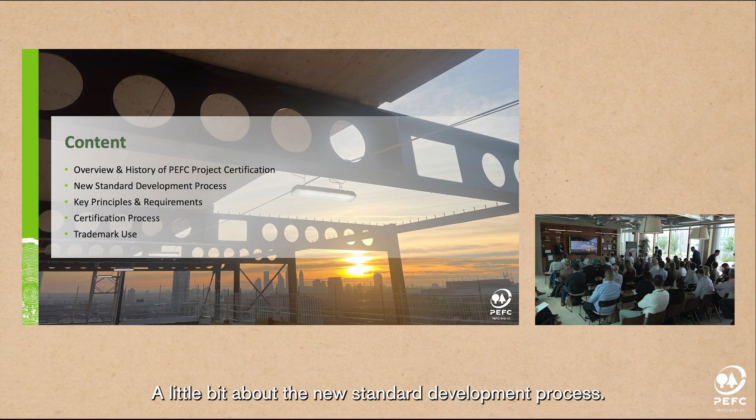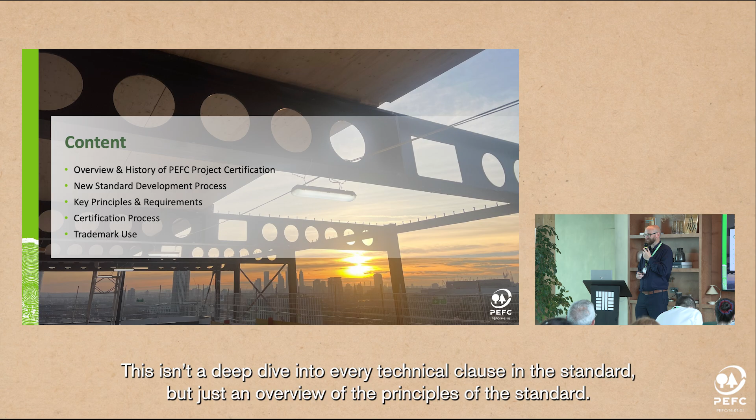Just an overview of what I'll talk about. We'll look at an overview and history of PEFC project certification, a little bit about the new standard development process, so we know who is involved in the development, and an overview of the key principles and requirements. This isn't a deep dive into every technical clause of the standard, but just an overview of the principles. I'm happy to discuss the technicalities with anybody who wants to know more.

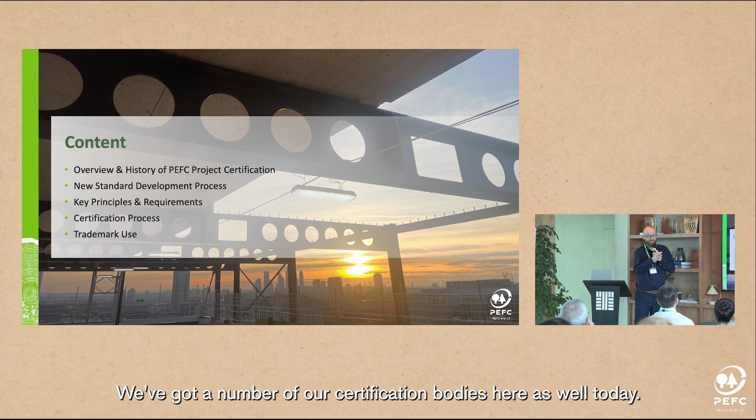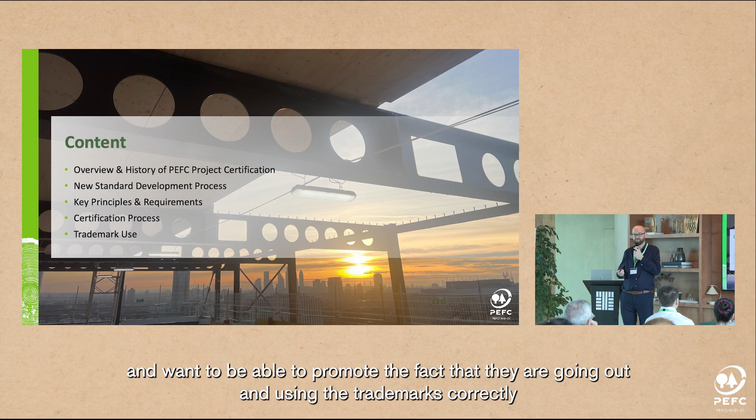The certification process, just an outline of that. We've got a number of our certification bodies here as well today, so it'll be good for them to understand that as well. And then also trademark use around projects, an important thing that organisations who want to go with certification want to be able to promote the fact they're doing that and use the trademarks correctly, to enable them to make statements and claims about their projects.

Okay, so just a little bit of an overview about project certification and what it is. It's a management system based on the chain of custody requirements that can be applied to projects rather than specific products. So actually for a project like this, it's what happens within the scope of the project in terms of timber procurement in relation to the project itself.

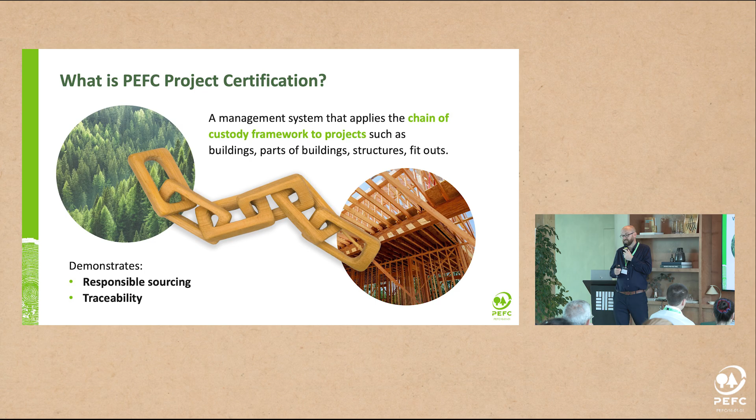It allows certificate holders, developers, contractors to demonstrate responsible sourcing for a project, and also traceability of those timber products back to either a certified origin or a controlled origin, depending on the timber.

In terms of the history, the first certified project was the Lighthouse building at the Zaragoza 2008 Expo. This was based purely on the chain of custody requirements, since at this time PEFC didn't have any specific project certification requirements.

2012 was a bit of a milestone in the UK and globally, as it was the first project that achieved both FSC and PEFC dual project certification.

In 2014, that was the point at which PEFC actually came up with the first set of requirements. They were tucked away in a guidance document associated with the 2013 version of the chain of custody standard. At the point we revised the chain of custody standards in 2020, that guidance document became more and more distant and was getting out of date by the day.

Interestingly, case in point here was when Timber Square engaged Preferred by Nature to do the audits here. Charles Townsend phoned me up and said, 'John, do PEFC have any project certification requirements?' I had to steer him in the right direction to those. So yeah, this was on the agenda for PEFC International to revise these requirements, and this is what we've been working on over the last 18 months.

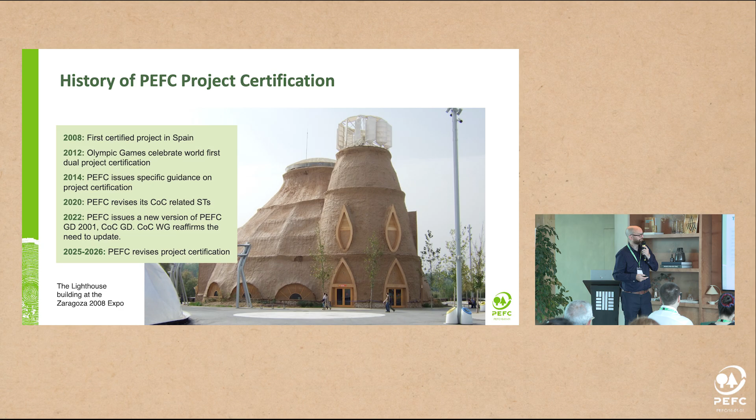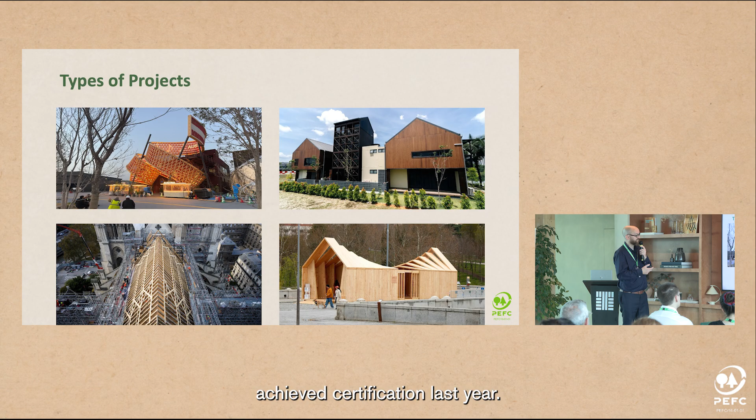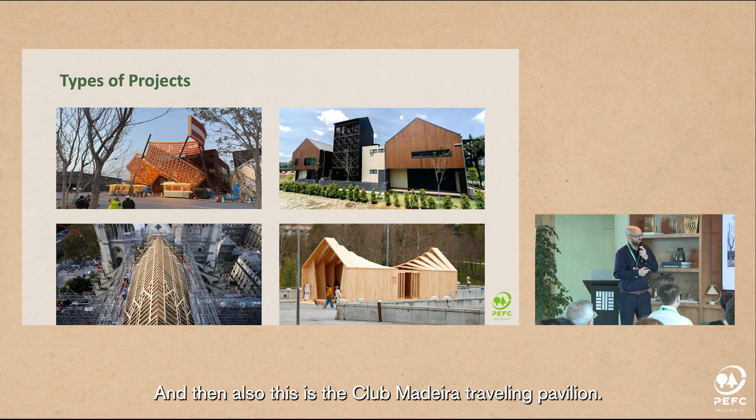Notre Dame de Paris, the rebuild following the fire, 95% of the timber in there was PEFC certified. And then also, this is the Club Madeira Travelling Pavilion, Waugh Thistleton designed, which just achieved project certification, a lovely little structure. In terms of the UK,

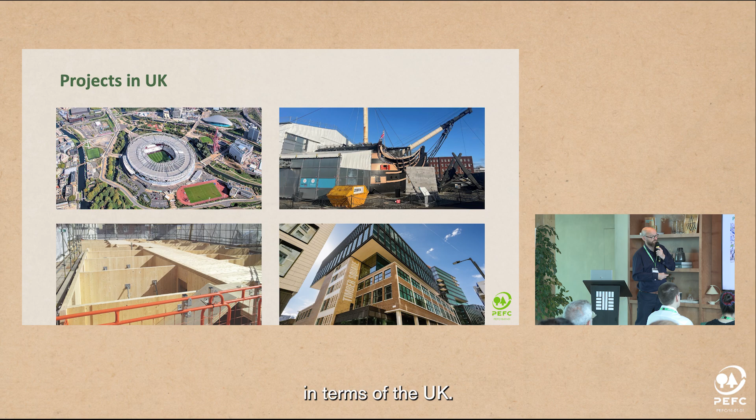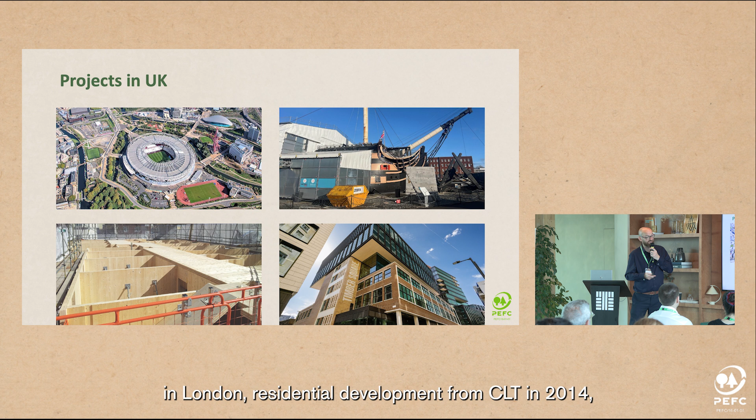we've had a limited number of PEFC projects, but actually we've had an increase in the last couple of years. As I mentioned previously, Olympic Park, Kingsgate House in London, a residential development from CLT in 2014.

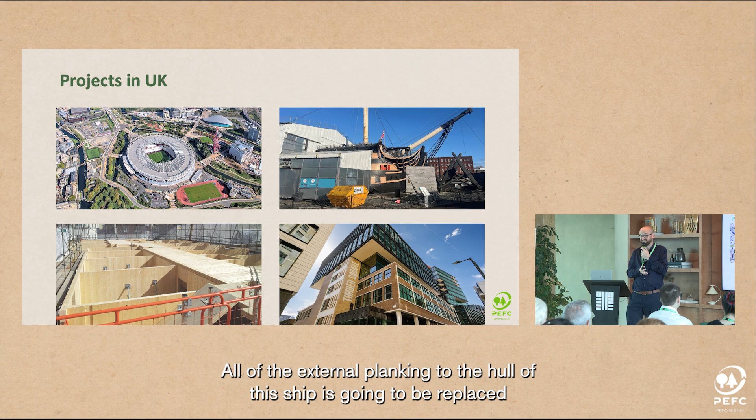Current ongoing project, HMS Victory, a 10-year conservation project. All of the external planking to the hull of the ship is going to be replaced. It's about 330 cubic metres of timber that's going to go in there, and it's all going to be oak. The idea is PEFC certified. They are just getting themselves ready for their first audit,

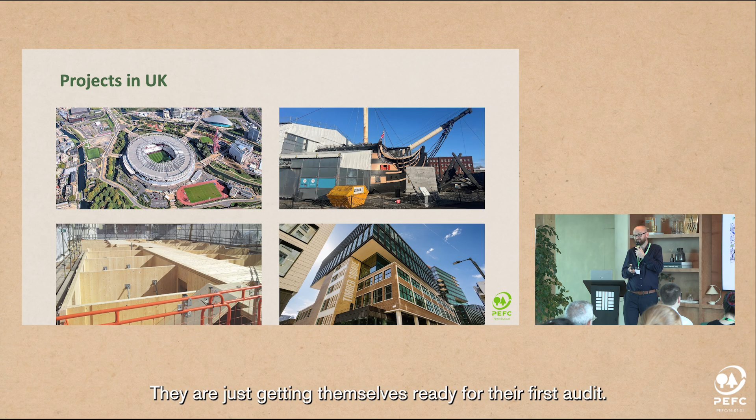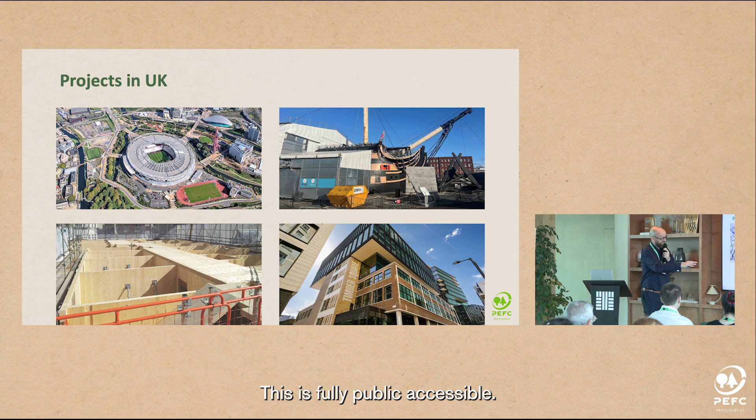so they will be either the first or one of the first certificates issued against the new requirements. Incidentally, well worth a visit - this is fully publicly accessible. You can go into this area of the building, there's a glazed screen and you can see the shipwrights and carpenters at work. It's really interesting, so I would recommend a visit. The whole museum is fascinating.

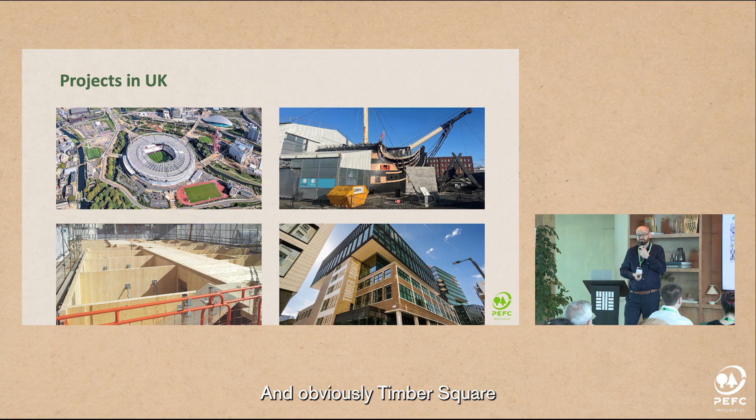And obviously Timber Square, which is just completed and certificate is imminent for this. So you see the variation in the projects that can be certified.

So in terms of the new standard development process, as I mentioned previously, the requirements were not normative, they were tucked away in the guidance document.

What we wanted to do was come up with a standalone set of requirements that were normative, enabling a consistent approach by certificate holders. We found that the way certain companies were applying the project certification requirements differed between countries, so a project in Japan could look different than one in the UK, which we didn't agree with. So having normative requirements provides a consistent approach to certification.

We wanted the standard, given that it was going to be standalone, to be more aligned with construction terminology as well. So the usability of the standard was really important in the development process.

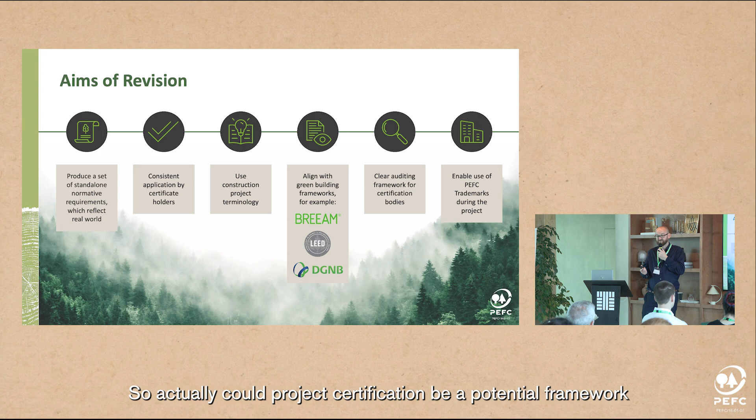We also wanted it to provide additional benefits. Could project certification be a potential framework for demonstrating compliance with other green building standards, like BREEAM, LEED, etc.? A clear auditing framework as well as a consistent approach by certificate holders.

We also wanted a consistent approach by certification bodies. What we found when we started looking at how project certification was implemented was that auditing schedules were very different in different countries depending on the certification body. So again, that was really important to address.

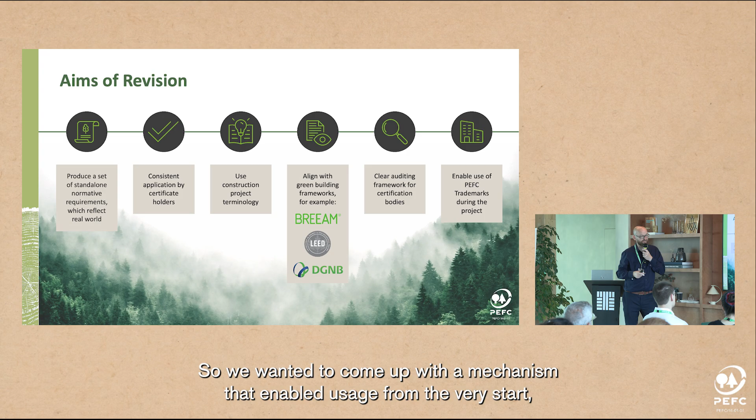We also wanted to enable use of the PEFC trademarks during the project. Under the current requirements, you can only use the label after the project's finished and you're issued your certificate. In a project like HMS Victory that's 9 years, starting certification now but only being able to communicate about it in 9 years' time isn't very practical. So we wanted a mechanism that enabled usage from the very start.

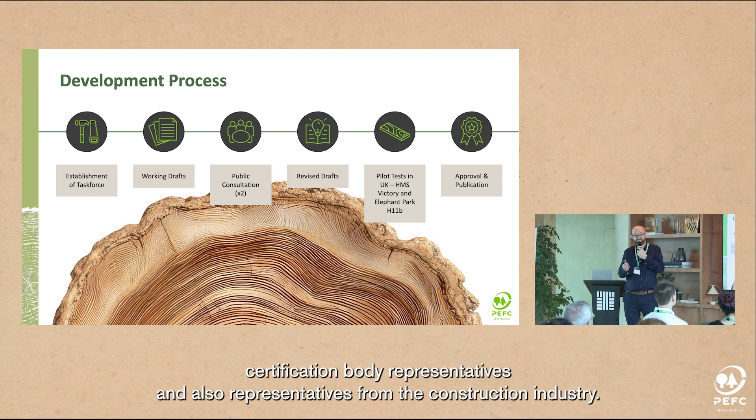The development process involved establishing a task force to write the standard, consisting of PEFC International technical staff, representatives from the national governing bodies, certification body representatives, and representatives from the construction industry. I was lucky enough to be on the task force. BAM in the Netherlands had representation, and Tom King from McAlpine, who's in the room, was on the task force too, so we got input from construction representatives who would actually be using the standard.

The task force then produced a series of working drafts, which went to public consultation. We had a couple of those, ended up with revised drafts, and then had a couple of pilot tests in the UK. HMS Victory was one of those, and Bovis also signed up for a pilot on one of the Lend-Lease projects at Elephant Park. Fiona's here today—many thanks, Fiona, for your input.

Pilots are really valuable, allowing us to road test the requirements and get feedback from potential users—some of the input we received was really useful. It also let us go through an audit process and get feedback from the certification bodies as well. So many thanks to Bovis, and many thanks to NQA who did the audit of that.

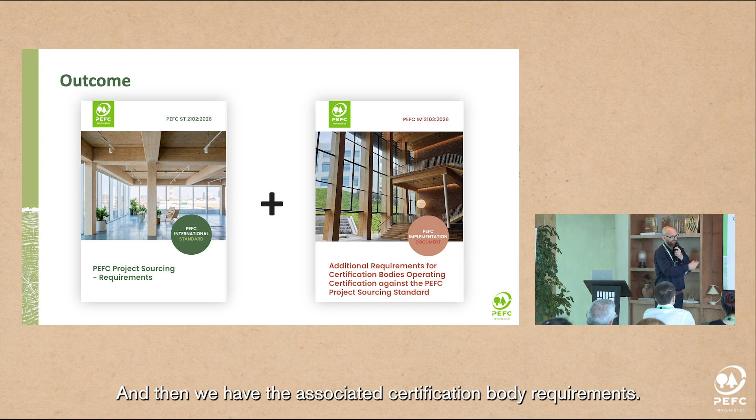Then the standard goes for approval by the national members of PEFC, and then we have the publication, which was on Monday. So the standard is now live. This is the standard here, and then we have the associated certification body requirements.

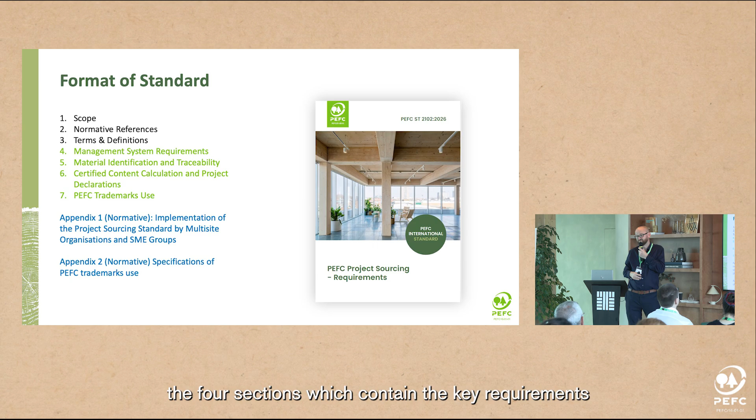The structure of the standard is set out with an introduction, four sections containing the key requirements, and a couple of normative appendices as well. I think in total these requirements total 8 to 9 pages.

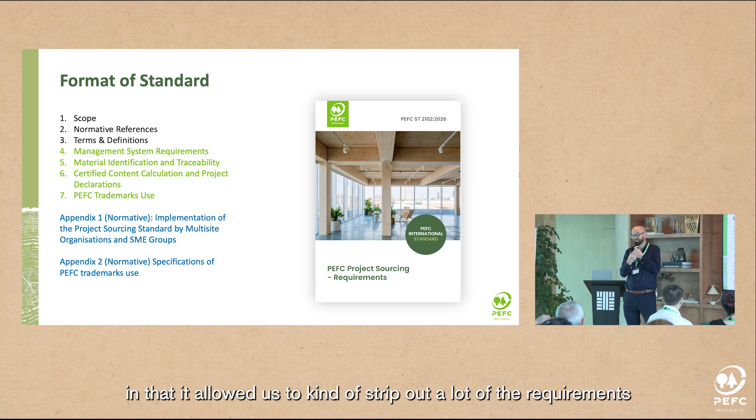One thing we wanted to do was keep the standard pretty lean and usable. The first draft, I think we have to admit, was a bit onerous in what we were expecting, and the feedback from the public consultation was really useful—it allowed us to strip out a lot of requirements that weren't deemed necessary. So a really useful process.

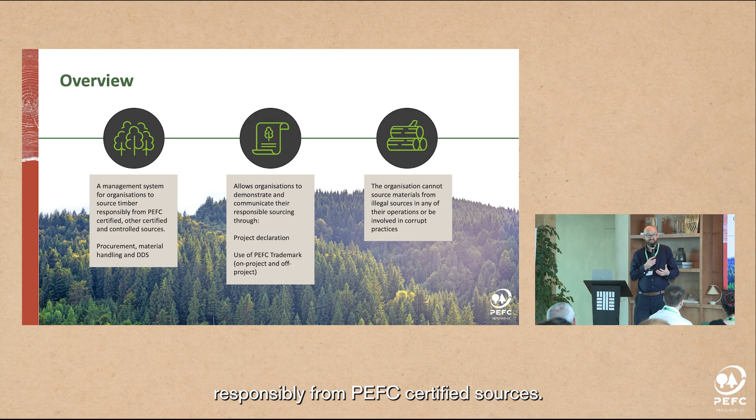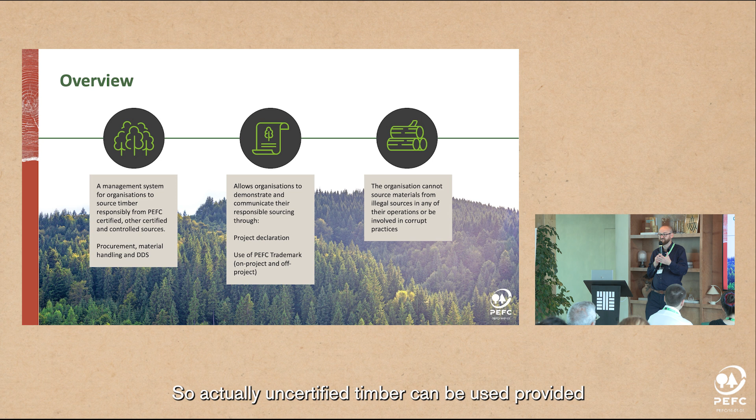In terms of key principles of the new standard, it provides a management system for organisations to source timber responsibly from PEFC certified sources. There's now provision for inclusion of materials sourced from other certification schemes, and from controlled sources—so uncertified timber can be used, provided it's gone through a full due diligence process in accordance with the PEFC requirements. The core of the standard's requirements centers around procurement, material handling to ensure there's no risk of mixing on project sites, and due diligence applied to the timber itself.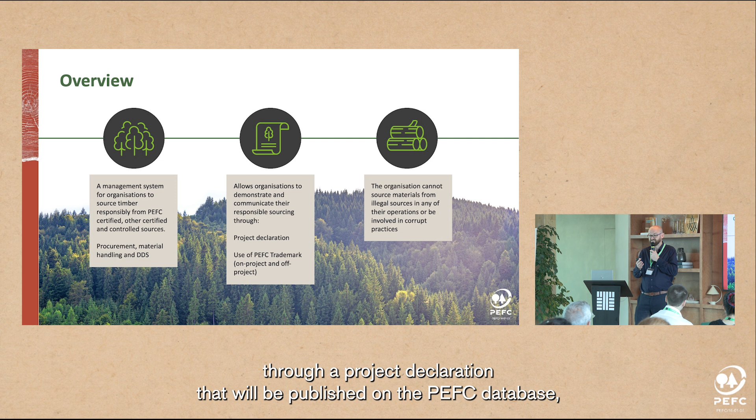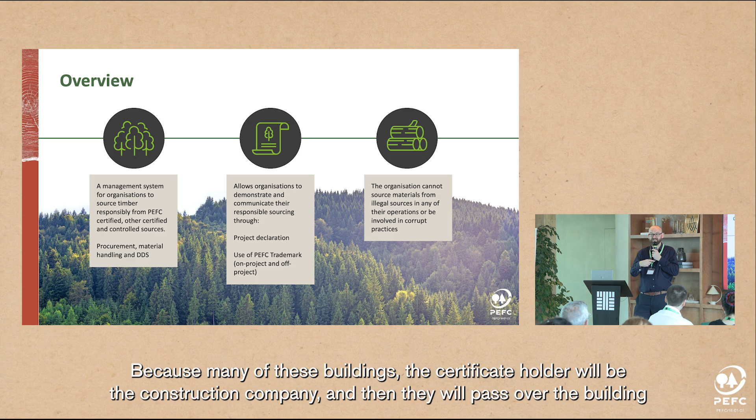This allows organisations to demonstrate and communicate their responsible sourcing for projects through a project declaration published on the PEFC database, and then the use of the trademark by both the certificate holder and the building owner afterwards. Many of these buildings have the construction company as the certificate holder, who then passes the building over to the developer or building owner, who may want to continue communicating about the project.

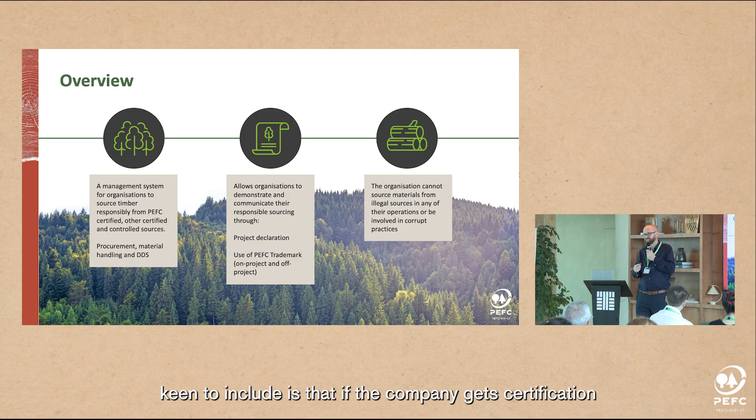One thing we were keen to include is that if a company gets certification, they may include certain elements of a project within that scope. Any timber they're sourcing that isn't in scope must be legally sourced. Also, as an organisation, through any of their operations, they cannot be involved in corrupt practices. We wanted a mechanism so a PEFC certificate isn't just put in front of illegal or corrupt practices by the organisation.

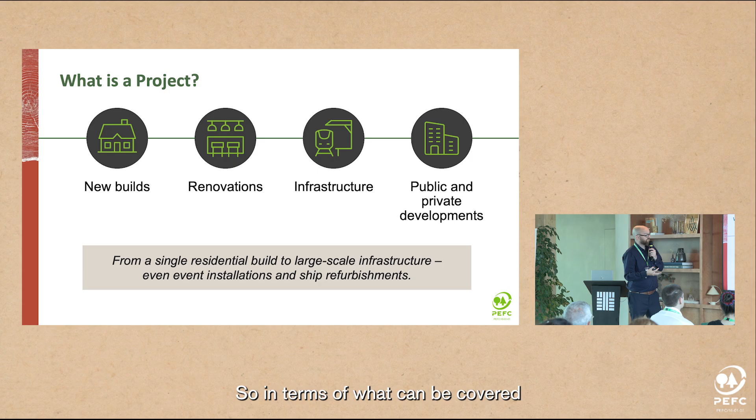In terms of what can be covered, a project can be new builds, renovations, infrastructure, public and private development, so there's real flexibility in terms of the application of the standard.

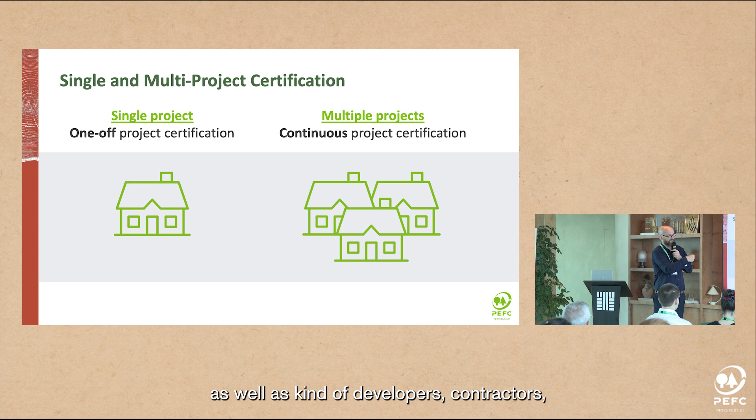One thing we've changed is that the certificate can be issued to a single project, so it could just last for the duration of that project, or there can be a continuous project certification, where if an organisation has numerous projects, they can establish a continuous certification and add projects into it.

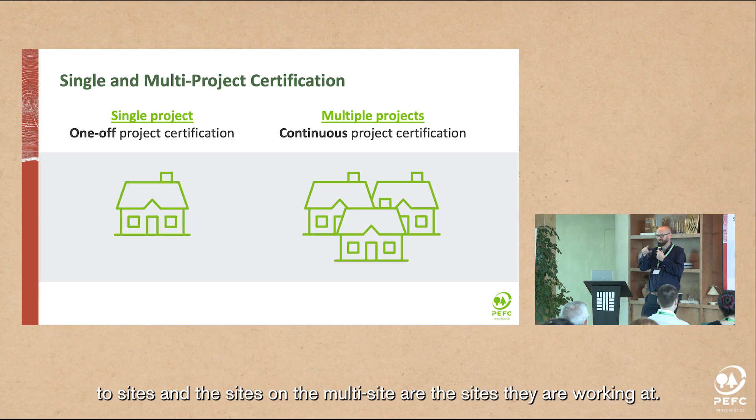This fits developers, contractors, and some of our existing chain of custody certificate holders better. We have a few construction companies who run a multi-site certificate for chain of custody, receiving materials directly to sites, and the sites on their multi-site are the sites they're working at. So this provides an alternative model of certification.

Types of certificate holder can just be a single certificate holder, for example MACE group. It could be a multi-site, a number of linked entities, so a multinational construction company with different legal entities in different countries could have them all on the same certificate.

We're also applying a group structure, so when you have smaller, organised smaller projects, it allows for a group manager who then supports and facilitates certification on those smaller projects as well.

In terms of the entities involved in a project, we have the organisation, who is the certificate holder overall responsible for managing the project. We then have the project members. To qualify as a project member, you must either procure, process on site, or install on site.

Those project members can be PEFC certified, or they don't have to be. So you can have an uncertified contractor working on the project site who receives deliveries of certified material, and the chain of custody can still be fully accounted for within the project.

In terms of suppliers, the differential is that they're just there to deliver to the project, and they need PEFC certification if they're delivering PEFC claim materials to the site. Also, as I said before, there's now provision for a proportion of other certified materials, so companies supplying those need valid certification against the alternative scheme as well.

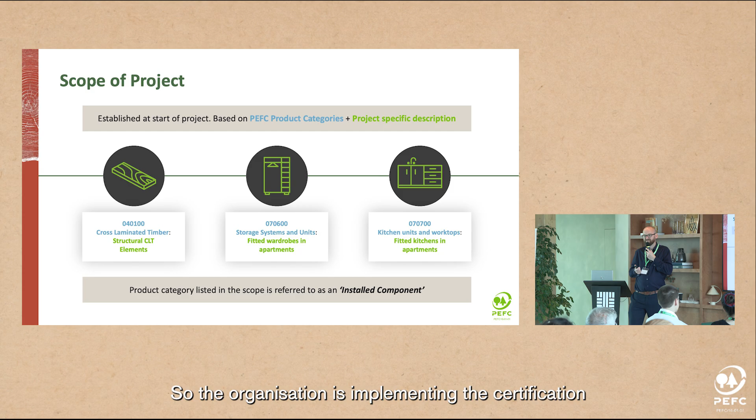The starting point is establishing the scope of the project. The organisation implementing the certification needs to identify which products they want included within the scope. It can be everything in the project, or certain items that they select.

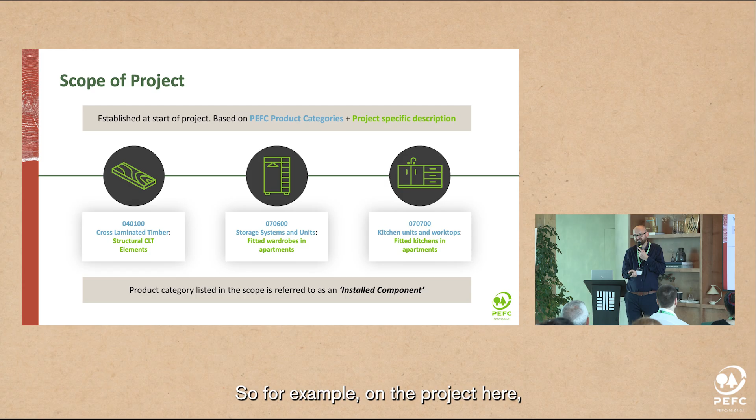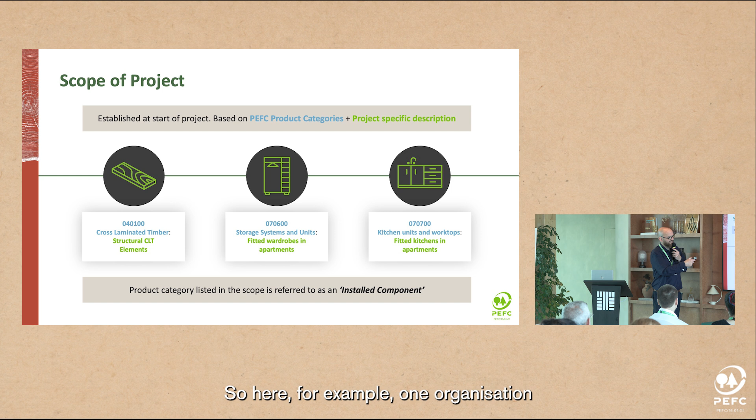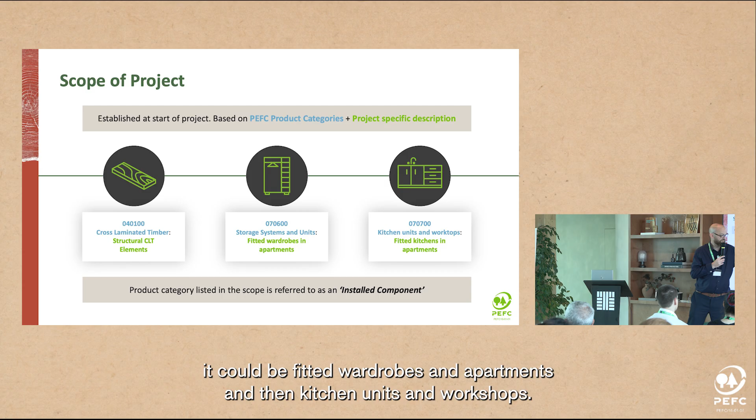So here, for example, we've got an organisation who may be including CLT within their scope, storage systems and units, so it could be fitted wardrobes in apartments, and then kitchen units and worktops. The categorization is done using the PEFC product categories.

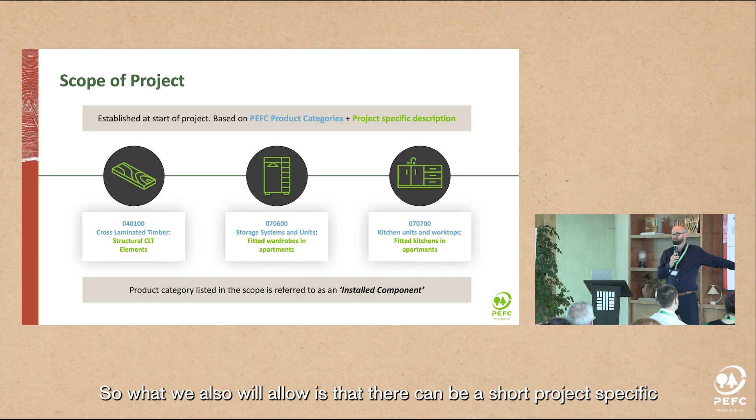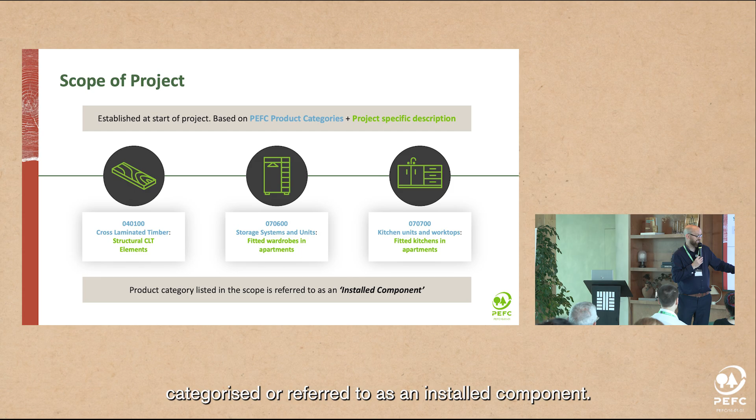A slight issue is that those categories are quite generic, not really project specific. So we also allow a short, project specific description to go on the certificate and on the database as well, giving some project specific information. Each of these items is then categorised or referred to as an installed component in the project.

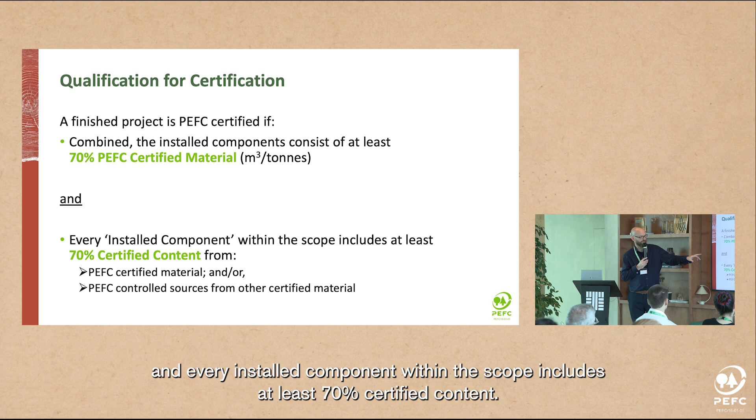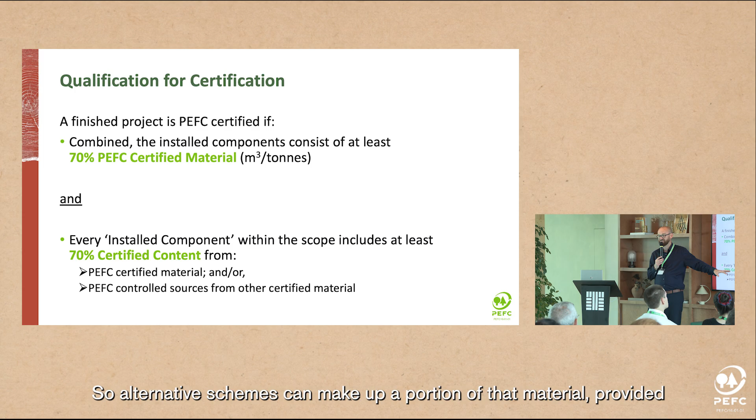In terms of qualification for certification, a finished project is PEFC certified if the combined installed components consist of at least 70% PEFC certified material, in either metre cubed or tonnes, and every installed component within the scope includes at least 70% certified content, from either PEFC certified material or PEFC controlled sources from other certified materials. Alternative schemes can make up a proportion of that material, provided the scheme meets PEFC's definition of controversial sources.

So just a little example of how that would work. If we have a project that includes 300 cubic metres of 100% PEFC certified CLT, we then have 50 cubic metres of storage systems supplied under another scheme with a 70% claim, and then kitchen units and worktops: 30 cubic metres from 70% PEFC certified material, and 40 cubic metres with a 100% claim from another certification scheme.

At an overall project level, the PEFC certified content is 76%. We have 300 cubic metres from the 100%, plus 70% of 30, which is 21 cubic metres. That gives us 321 cubic metres divided by the total volume, 420, which gives us 76%. So we're qualified on that front.

Then at an installed component level, looking at certified content, the 300 cubic metres of CLT is 100% certified content. The fitted wardrobes have 70% certified content from the scheme, and the combination of the PEFC certified material and the 40 cubic metres with the 100% claim from the other scheme gives us 87% certified content. So that will qualify for project certification.

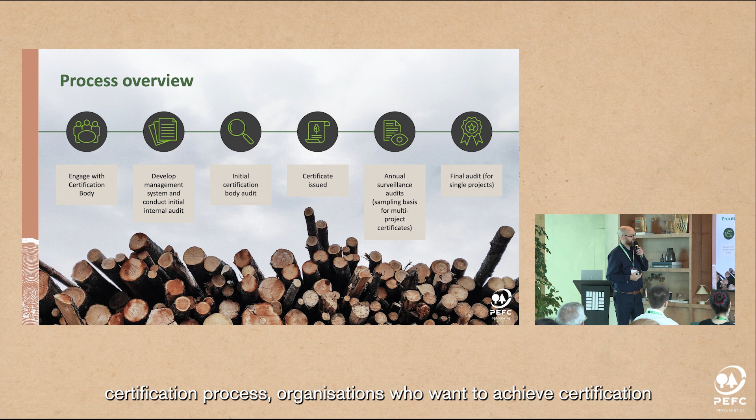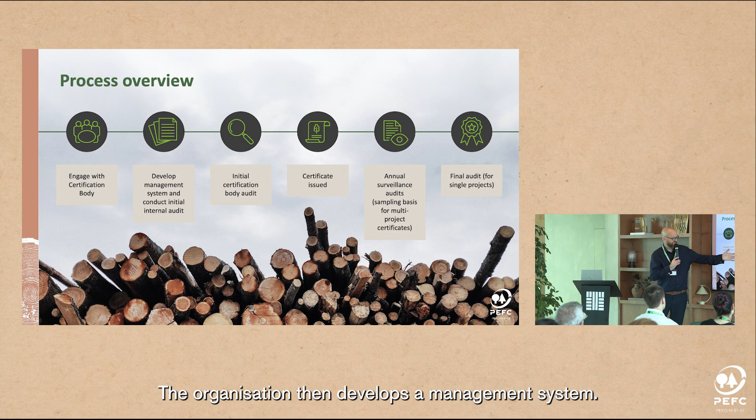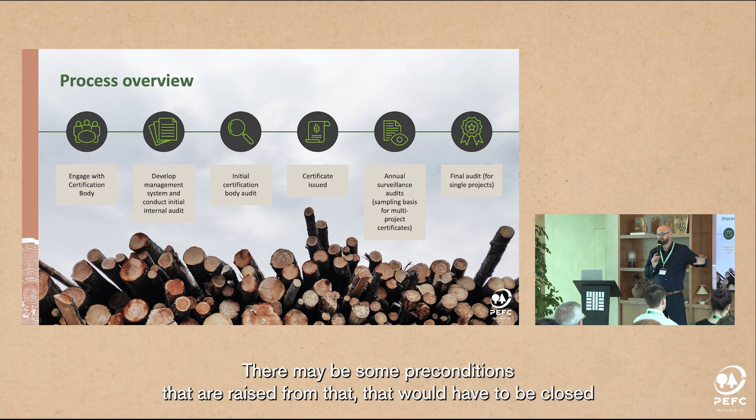In terms of the certification process, organisations who want to achieve certification initially engage with a certification body. They agree a schedule, timescales, costs of certification. The organisation then develops their management system and is required to conduct an internal audit before the initial certification body audit. That initial audit occurs, there may be some preconditions raised, but these have to be closed after which the certificate can be issued.

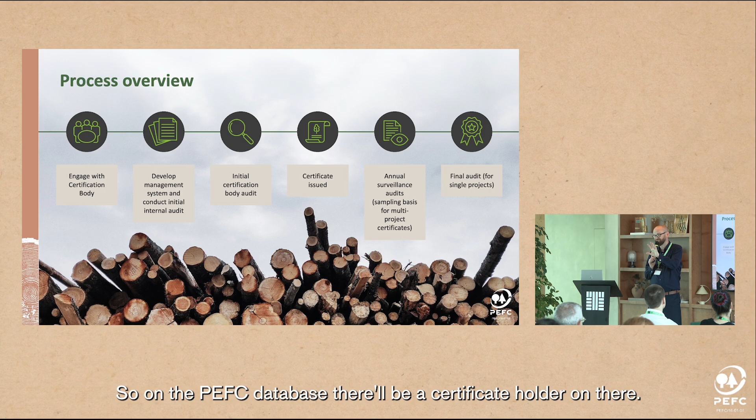When that certificate is issued after the first audit, on the PEFC database there'll be a certificate holder listed, and then the project registered as an ongoing project, so there'll be two registrations. Rather than under current requirements where the project's only listed at the end, it'll be on there from the very start.

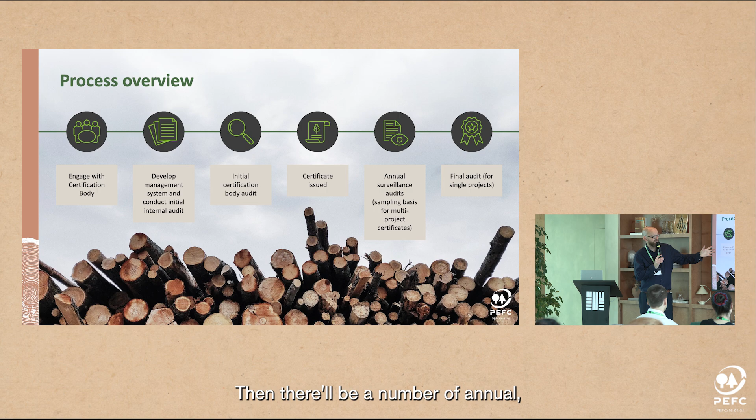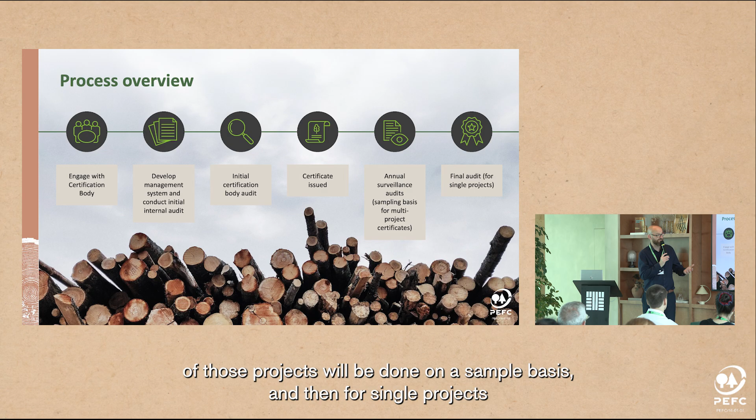Then there'll be a number of annual surveillance audits by the certification body. In the case of continuous certification that may include multiple projects, auditing of those projects will be done on a sampling basis. For single projects, there'll then be a final audit at the completion of the project.

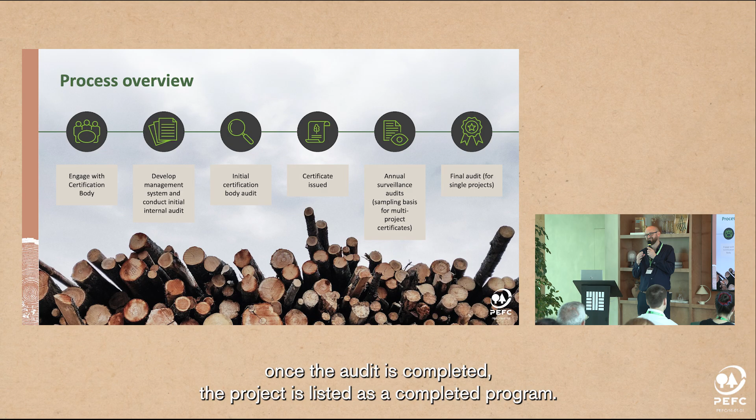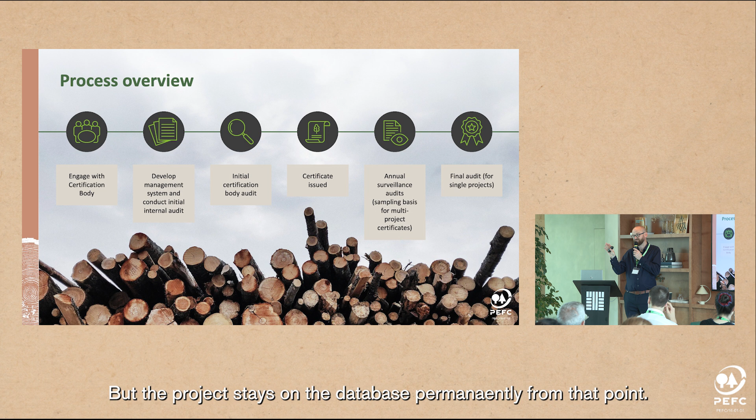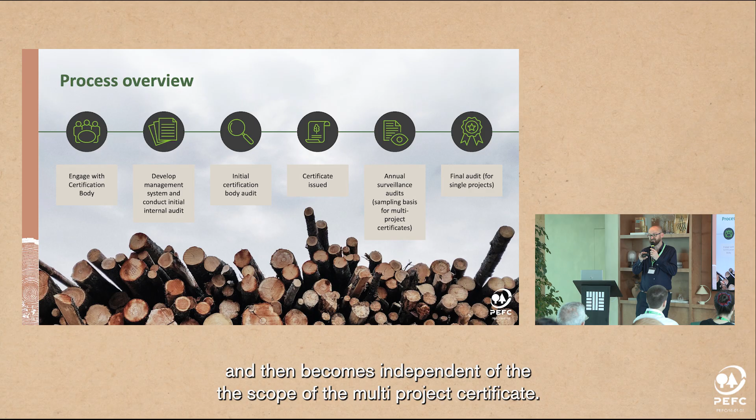At that point, once that audit is completed, the project gets listed as a completed project on the database, and the certificate of the organisation seeking that single project is then terminated. But the project stays on the database permanently from that point. Likewise for organisations running continuous certification, once the project is completed, it's listed as a completed project and then becomes independent of the scope of the multi-project certificate.

Trademark use: once the certificate has been issued, we will then be notified. If it's in the UK, PEFC UK will be notified. We would then put it onto the database and issue the trademark licence to the organisation. Once they sign that and send it back to us, we'll give them access to the label generator.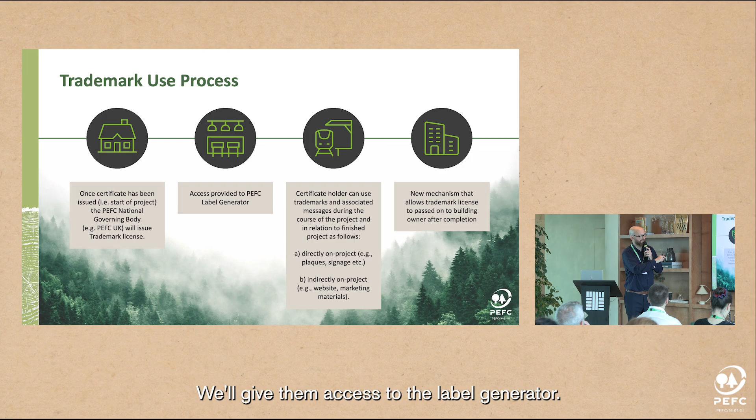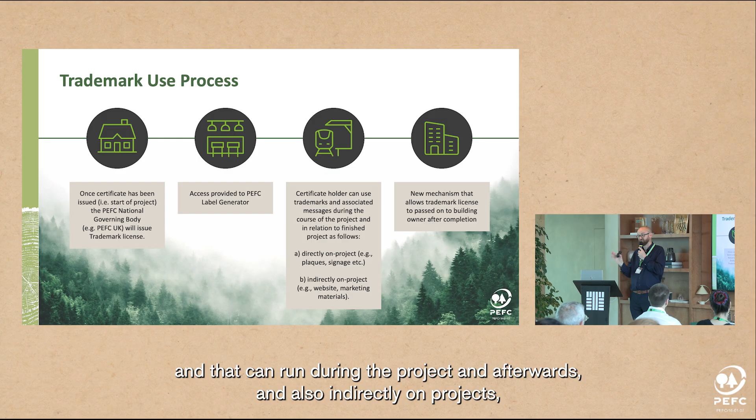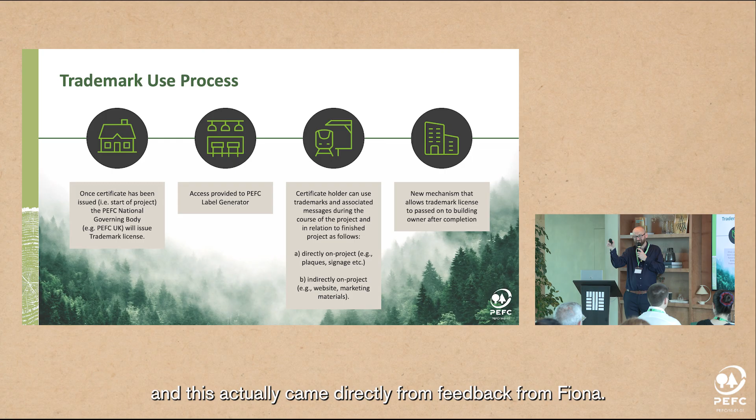The organisation then has the opportunity to use the trademark and a number of approved messages in relation to the project. That can be directly on the project, so it could be on site hoarding, could be plaques on the building, and that can run during the project and afterwards, and also indirectly on projects, sustainability reports, websites, etc. This actually came directly from feedback from Fiona, regarding the mechanism that allows that trademark.

For example, in relation to Timber Square, if we applied the new requirements, Mace Group would be the licence holder during the course of the project, but at the end of the project they hand the building over to Landsec. Gregor might say, actually we want to carry on using the trademark on our website. So now there's a mechanism where that trademark licence can be passed on to the building owner as part of the handover of the building. Again, just trying to make the standard more practical, more usable.